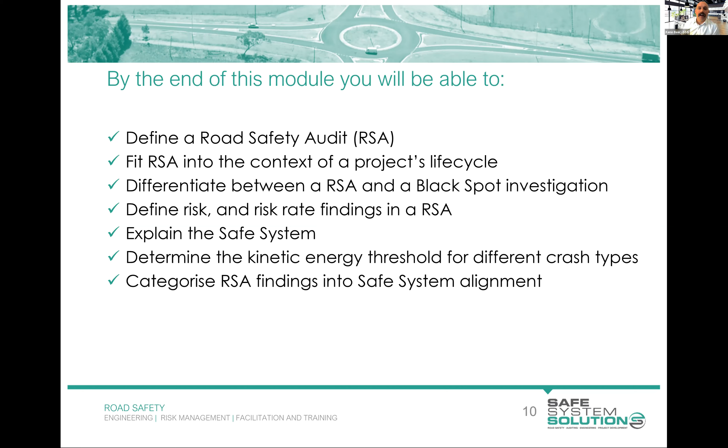What we do in this course overall is about the process of road safety auditing. There is no possible way in this short amount of time that we can teach you everything to see out there on the road network that presents risk. That's a never-ending learning process, and you need a lot of time and experience. But what we can teach you is the process and a few key things that keep coming up over and over, or typical ways to look at stuff.

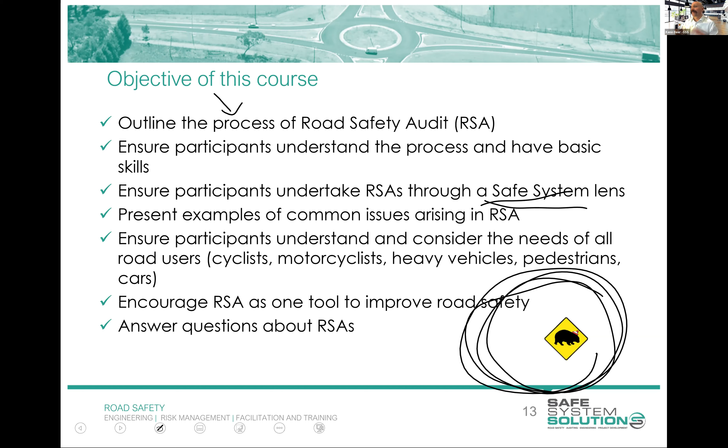There you go, I'm going to be nice. Wally count is one. No more help on Wally counts for the rest of the modules.

This looks messy and scary, this diagram. It's straight out of the Austroads Guide to Road Safety, Part 6, Road Safety Audit. It's showing the life cycle of a road or a project. You've got the project, so that's if you're going to do upgrades to a road, for example. But either side of that, you've got the existing road, and you've got corridor planning and business case and strategic thinking. Then the road's open, and you've just got a network. You've got a whole road network that's existing, and it's got issues, and you've got to maintain it.

You've got to look at things. So we can inject road safety into this whole life cycle in a number of different ways, and you can see them here. We've got safety vision, we've got proactive techniques, and road safety audit is what we call a proactive technique for injecting safety into your network or your project.

We've got predictive techniques such as ANRAM, AusRAP, IRAP, the Safe System Assessment Framework.

Now, Kathy, I didn't mention, but we have a lot of prizes that we like to give out. You were in the prize pit there with Emma. We've got to give out lots of prizes. So how about this - I'm going to say the first person to type in what IRAP stands for wins a prize.

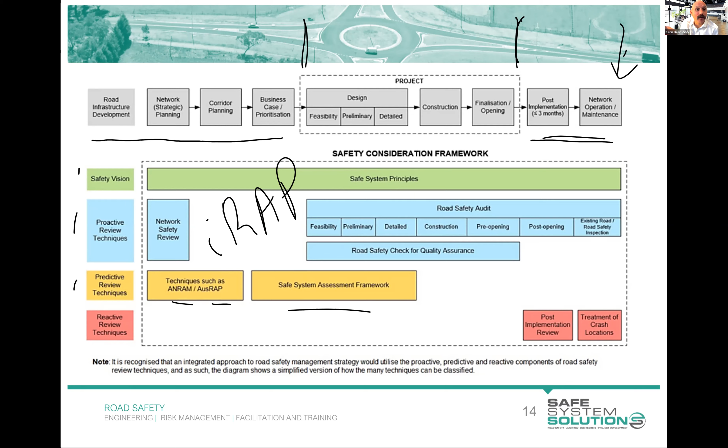IRAP, so it's part of the predictive review techniques, but basically it is an International Road Assessment Program that takes a whole lot of road variables and gives you a risk rating for the road. And actually star rates roads, the same way your fridge gets star rated or your washing machine gets star rated, your road gets star rated. We do a lot of it as well, Nick, so it's glad to hear you're using it as well.

And then down here we have this reactive techniques, right? These are once crashes are happening, or once you've identified there's issues - post-implementation reviews, or if you've got a cluster of crashes, treatment of crash locations, black spots. Okay, that's different to a road safety audit. Once you're dealing with a pile of crashes, you're actually doing another process. There's a lot of overlap between it and a road safety audit, but nonetheless it's got its own name - it's a black spot investigation or a crash location treatment exercise, crash review.

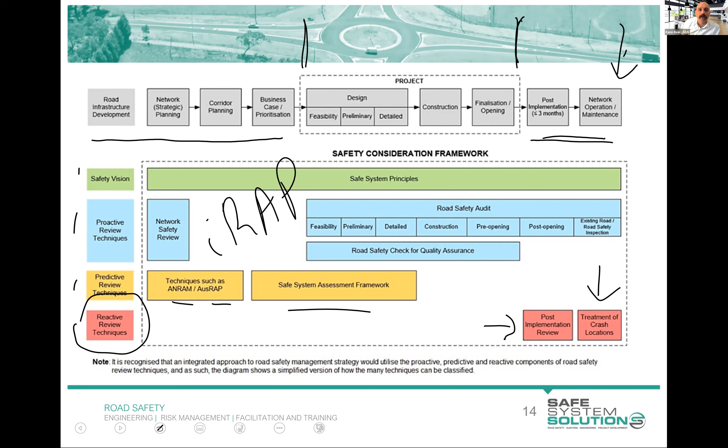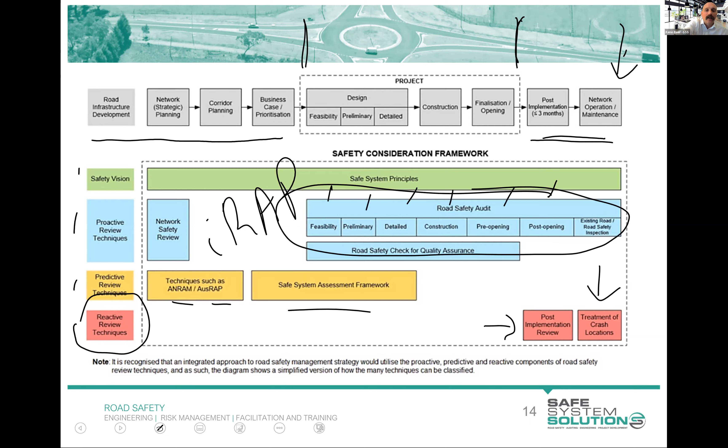Okay, so you see road safety audit sitting in there and lots of different stages of audit. They're all sort of stages of a project or an existing road, and I'll come to that later. But that's sort of a general context around that.

Okay, common road safety audit misunderstanding - that a road safety audit is a check against standards. Okay, it's not, because standards don't necessarily equal safety. So you may follow all the Australian standards, the Austroads guides, local standards and guidelines and the like, and what you produce may or may not be safe. It's a pretty good starting point because there's been a bit of good thinking into the development of guidelines and standards, but there's a few reasons. Standards may come together in a way that presents an unsafe scenario - so it may meet standard, and the other one meets standard, but they come together in a really bad way. The standards may be old, may have inherent risk as part of those standards. And sometimes people may be missing standards, or there may not be a standard around that topic that you're talking about.

Now, those who do road safety audits and do lots of road safety audits in other countries will see that some of the standards are just abysmal in terms of the amount of risk that is inherent in that standard. And so you may be picking up issues that meet their standards, but you're presenting as safety issues. This term road safety audit, though, has got this real connotation of like a financial audit, doesn't it? I mean the term audit - you're thinking, well, I'm checking that against the standard and giving it ticks and crosses. Well, road safety audit is not quite like that, but it does include a bit of review of standards as well. I'll take you through all this.

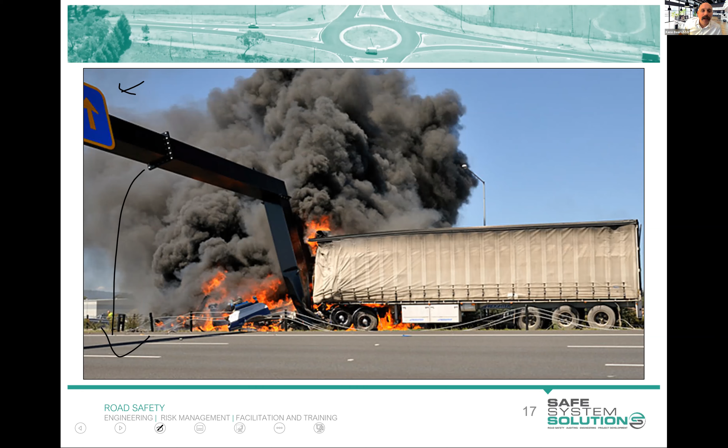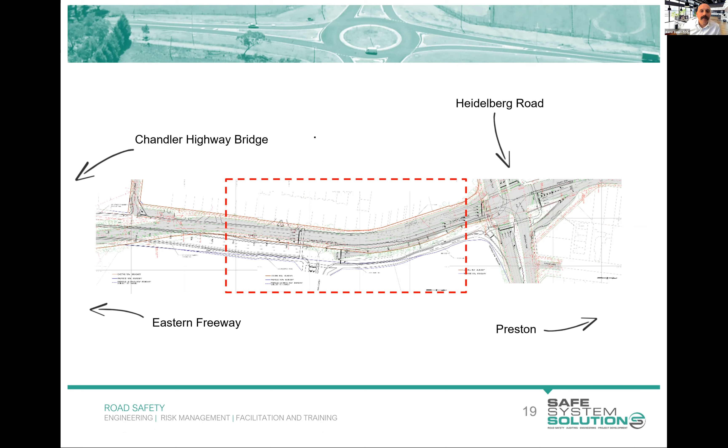And we know that a trap lane is going to have crashes in this area, because vehicles are going to come up to it, realize that all the other vehicles are going past, they want to get in, keep going - we're going to have rear end crashes, we're going to have side swipe crashes. The thing is that this is again a $500-600 million project, and they are building a trap lane into it. So again, as an auditor, this is where we can do some wonderful things, where we can suggest alterations to the design to make sure this isn't a trap lane.

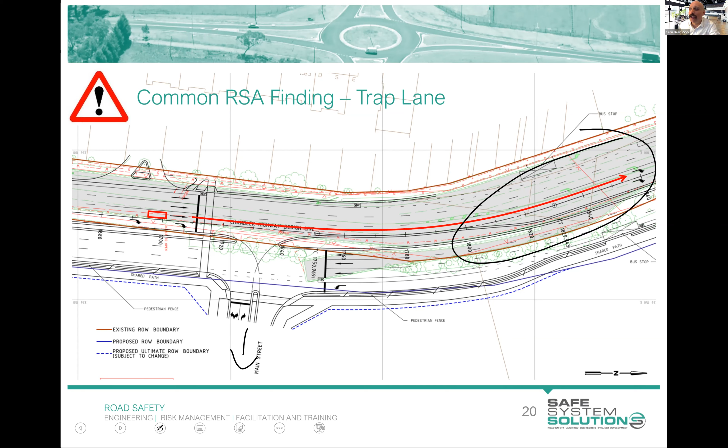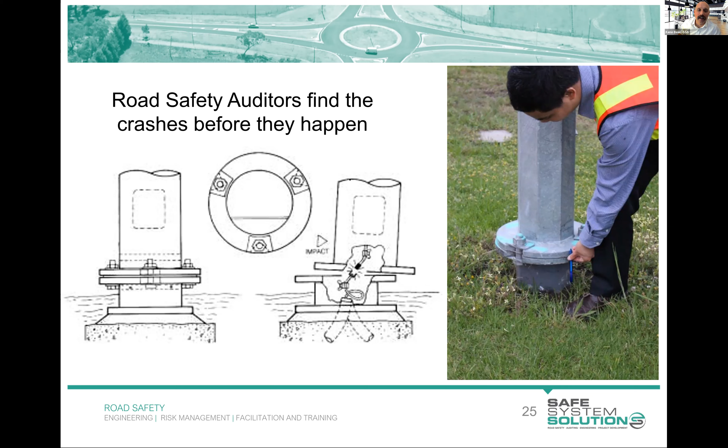Lighting, that's good. Is the lighting going to cause any see-through effects? Is it going to cause other issues? Is there enough of it? Does it cover the pedestrian crossing locations? All of these questions you might be thinking about.

And then you might say, okay, now what if somebody leaves the road and hits one of these light poles? What's going to happen then? So you might be suggesting that they use slip-based poles, or in some situations, you might be suggesting that a slip-based pole could be another issue. Now, somebody want to type in when they think a slip-based pole could be another hazard?

We just saw them working in action and they were awesome. But when would you potentially not be wanting to use a slip-based pole?

Okay, so this is good. We've got lots of people talking about areas with pedestrians, high numbers of pedestrians, and where is it going to fall? So who are we going to go with there? I think it was Nick who was first on the pedestrian ones. I think the pedestrian one is a sort of dominant one.

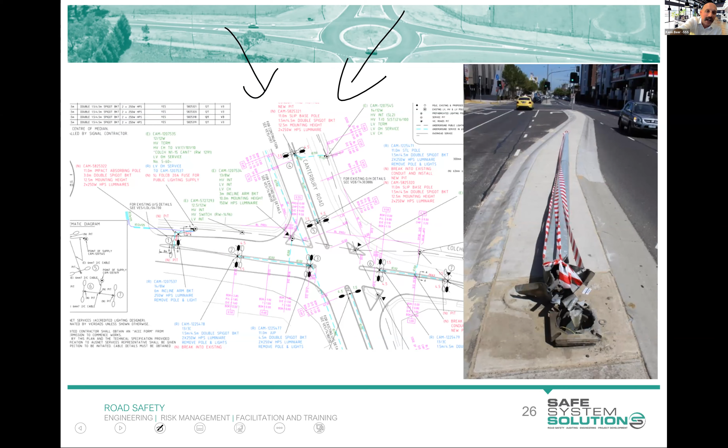So this was Victoria Gardens, and I was just noting that that one back there was actually just near there, which I thought—oh, it's quite a high pedestrian area just as the way it plays out. So something you might scratch your head about as an auditor when it looks like this. Because once it's in, I tell you, they're probably not going to change it. It costs a lot of money to change it. But when it's just at this stage, it's actually really easy to change.

Okay, so there is another type of frangible pole. Frangible is the term that we use for breaks away on impact, or it absorbs energy on impact. Frangible is a term very heavily used in our profession, and I always need to remind myself not to use it in community public consultations because they don't know what the hell I'm talking about.

But this one is called an energy absorbing or an impact absorbing pole, and it's like a slip-based pole, but it doesn't break away at the bottom—it actually just engulfs the vehicle within it, just the way this one has. So if you're really concerned about a pole in a medium to lower speed environment where you didn't want it going too far out, you'd probably use an energy absorbing pole. If you're in a high speed environment, you use a slip-based pole.

And if you're in a very low speed environment, you can just use rigid poles because the energy is not enough to be imparting death or serious injury on the drivers of the vehicles, and the dangers of it falling are greater than any potential injury to the occupants of the vehicles. So there's a little bit of an insight into poles. Again, I'm just picking random topics.

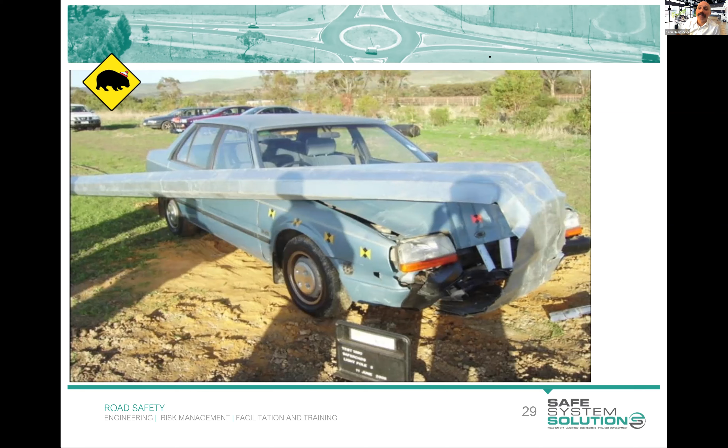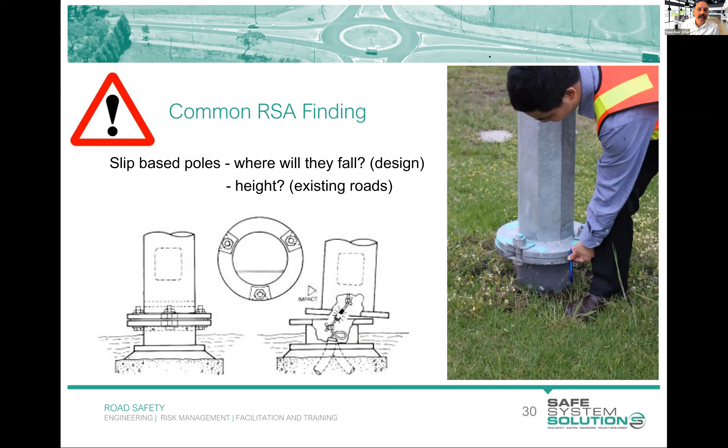The thing is, a slip-based pole or a rigid pole can meet standards in pretty much any scenario. You've just got to make the judgment in contextualizing it in the right spot, asking the right questions. The common audit finding is whether slip-based is chosen, where it will fall, and what's the height of existing slip-based poles with the shearing plane.

Another common misunderstanding is that road safety audits are proactive and black spot investigations are reactive. This is one I still get weekly: can you come and do a road safety audit, we've had 10 crashes at this intersection? Now I say, you want me to do a black spot investigation, really?

Now, the lines are blurred here. You can do a road safety audit of that intersection, it's just you don't really delve into the depths of those crashes. You don't get the police reports, you don't need to. You don't need to look exactly at what was going on, because you're auditing what's there and what you see, and it's not driven by just those crashes.

As I said, this one's probably blurred a bit, so I'm not as concerned. And in fact, this question here - should you look at the crash history as part of a road safety audit - this is personal preference for auditors. It's up to you. I know auditors who refuse to look at crash history, and I know auditors who love looking at crash history.

I will often do my audit, then have a look at the crash history just to see if I missed anything and validate that I was thinking along the right lines. You might look at everything, then come back and look at the crash history and find it had 5 motorcycle crashes. You say, whoa, what am I missing here? Is there a major motorcycle route I've missed completely? Hopefully you'd be able to pick a lot of that stuff up from discussions with your client anyway.

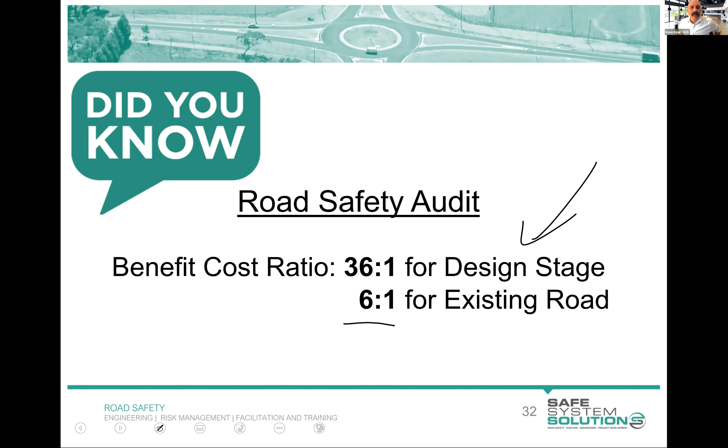Yes, thank you, Ken. So what about auditing proposed designs, i.e. black spot treatments? There's a question here saying, I often get them done once our design is ready to be issued for construction. Yeah, okay, that's probably a little late once they're ready for issue for construction. I'd like that done a little earlier in the process in order to be able to alter the design and genuinely take on what the auditors are saying.

If you've got your detailed design set fully ready to go, basically stamped and issued for construction, there's a lot of reluctance to make changes, and it starts to lend the audit process into a tick box exercise, which we don't want because that's a waste of everybody's time and money. So a little bit before that would be good. Get your design done, everybody generally happy or on the same line, get it audited, and the auditor might come back and suggest extending the barrier a little bit, or altering this, or changing this, or pointing out you've designed a trap lane in there.

We see this as a concern. Could that be altered? Remember that the auditors are just providing you advice, okay, you are not bound by what the auditor says. You've got a raft of issues to deal with - drainage, community, costs, all this stuff to deal with. The auditors are putting forward their opinions on how you can get better safety outcomes, or identifying you've designed in an absolute clanger. I can show you some, in fact I'll show you some shortly. So a little bit earlier would be great.

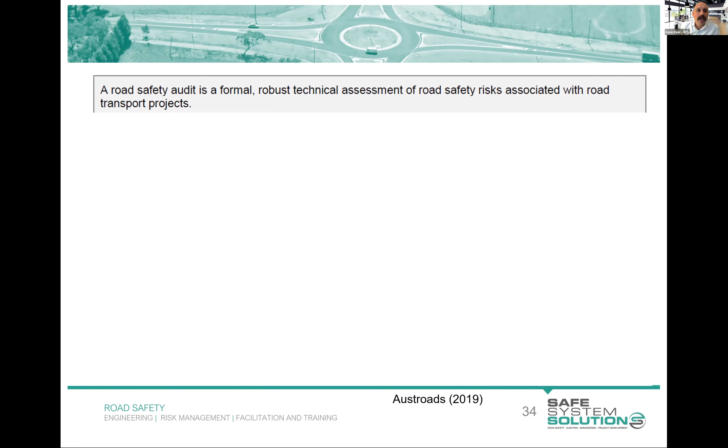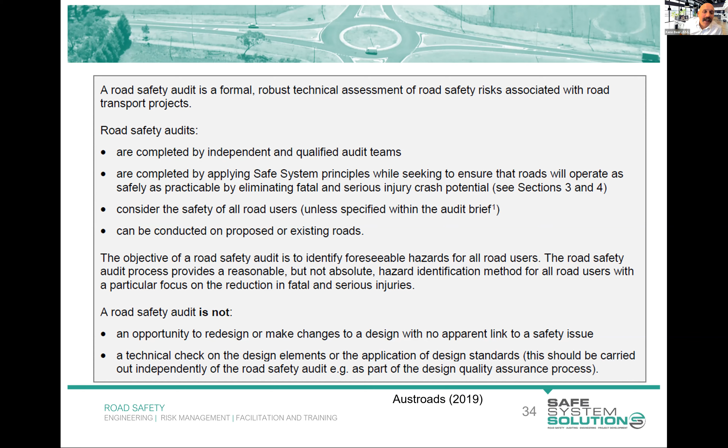This is the definition of a road safety audit. It is a formal, robust technical assessment of road safety risk associated with transport projects. It's completed by independent and qualified teams. It applies safe system principles while seeking to assure roads operate as safely as practicable by eliminating fatal and serious injury. It considers the safety of all road users, unless specified within the audit brief - I'll come back to that. It can be conducted on proposed designs or existing roads. Its objective is to identify foreseeable hazards for all road users, and it provides a reasonable but not absolute hazard identification method, really focused on fatal and serious injury. Now, it's not an opportunity to redesign the project with no apparent link to safety, and it's not a technical check on design standards. That should be undertaken internally as a quality review process with any design house anyway.

Let me just point out a few specifics. It's formal, okay - the audit process is a formalized process. It's set, it takes time, and there's a specific way it has to be done. You can't just call anything a road safety audit, it's got to be done in this process. It's got to be done by independent and qualified teams. You cannot road safety audit your own design. You cannot road safety audit a project that you are the project manager for. You can road safety audit a road that you are managing if you're a council or a state road authority or a department of road authority - that's okay because it's not your design, it's the existing road network.

It applies safe system principles - I'm going to take you through that. All road users, all right, we're thinking about everybody. If your brief says this is a motorcycle-specific road safety audit, you're just thinking about the issues for motorcyclists, or if you're doing a cycling audit. I'll talk about what we call thematic audits later, but it's got a specific theme - motorcycle, cyclists, walking, proposed or existing roads.

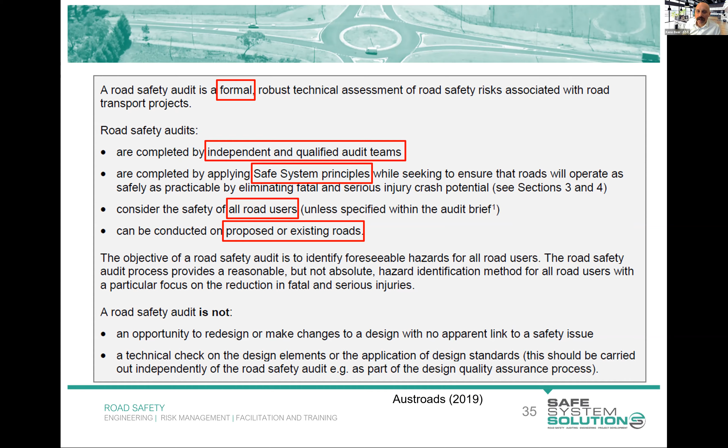Okay, let's talk about the safe system. I think we might have a quiz coming up shortly, unless I've hidden that slide, but anyway, I think we do. The safe system is probably something very familiar to a lot of you, so I won't spend too much time on it, but basically the safe system says humans are flying around or traveling around on this transport network, and the human body is vulnerable and it can only handle a certain amount of force.

We know that people make mistakes. It's part of being human. They're going to continue to make mistakes, and we've got a shared responsibility, which means that knowing people are going to make mistakes and knowing that their bodies are vulnerable, we've got to start designing the road and the infrastructure, the speeds and the vehicles to accommodate that error and the energy and forces associated with it. We are going to do everything we can to minimize mistakes. Don't get me wrong, it's not like we're just going to happily let crashes happen. We're going to minimize the number of crashes, but some are still going to happen because mistakes will happen, and we need to manage that energy.

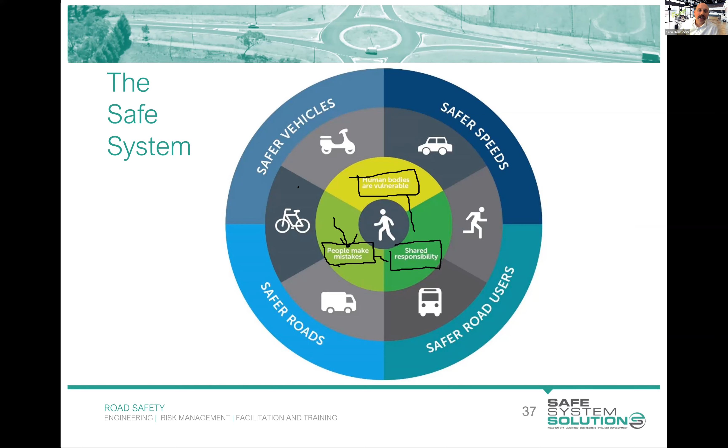The key principles of the safe system: we're aiming at no death or serious injury. That's our aspiration, that's our future intent. I'm not going to get caught up in the debate of whether that'll happen within your lifetime or not, and those sort of things - we aspire to that. We know people make mistakes, we've got a shared responsibility, and people are vulnerable.

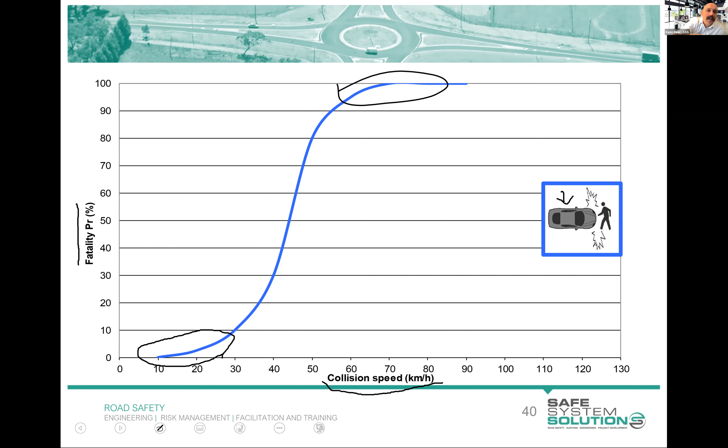Now, Usain Bolt, he came in up there in terms of his running speed. And I do that analogy because if you park the car at the end of his lane, when he ran that world record 100-meter sprint and he crashed into that at 44 kilometers an hour, will he survive? Well, he's the hulk of a human, so he's probably going to survive. His stature is strong - we kind of evolved that way as humans. We're strong enough to run into solid objects at our maximum running pace. That's generally around our tolerance to physical force. And of course, we propel ourselves way faster than that, and objects come at us way faster than that, and we're just not designed to tolerate that.

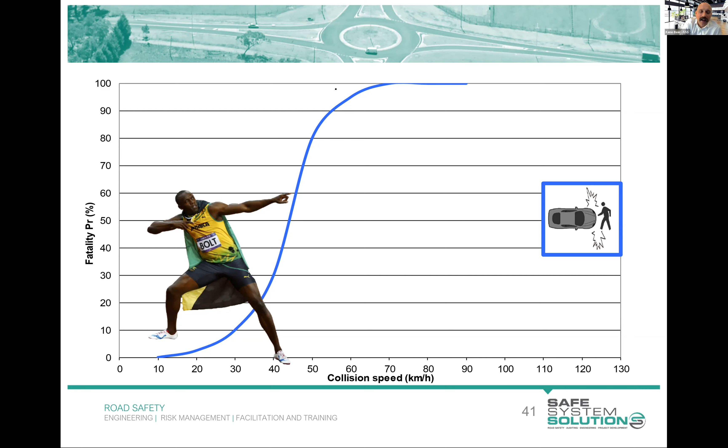What we are designed to tolerate is this sort of stuff.

This is one I really miss the feedback of a live audience going, ooh. But this is what we're designed to withstand in terms of force. And certainly he recovers, he leads a normal, healthy life.

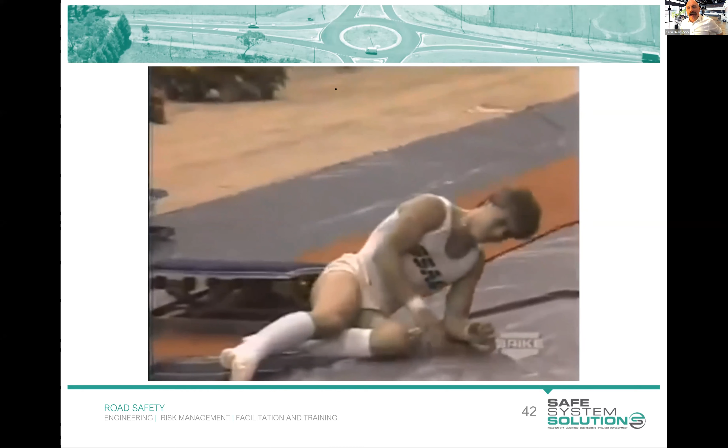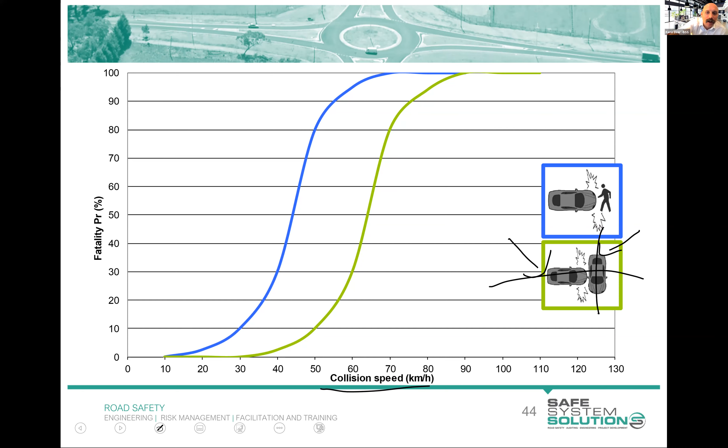We have this information for other crashes as well. So this green line, this is the bullet vehicle, the one that does the striking, does the damage. This is the target vehicle, the one that gets the death and the serious injury. Bullet vehicle speed at a right angle crash, around 40, 50 kilometers per hour,

highly likely to survive. Up at around 80 or 90, highly likely to be killed, the target vehicle occupant, if struck on that side.

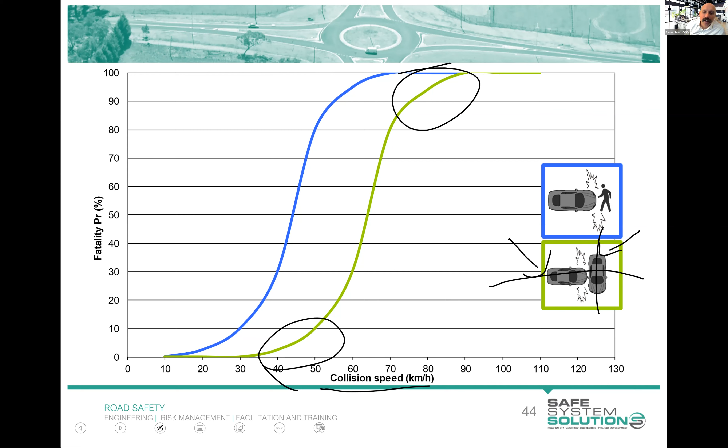And head-on crashes, okay? Head-on crashes we see around 60, 70 kilometers per hour, highly survivable, up around 100, 110, highly likely to be killed. And that's the speed of each vehicle, not the closing speed as such. It's the speed of each vehicle.

Now, this stuff is actually really important as we go about road safety auditing to think about that severity of crash, okay? And so what we do in road safety auditing is draw a line at this 10% level. And we ask the question in the audit:

will the crash that I'm predicting happen above this point or below this point? So I'm worried about pedestrians being struck. Will they be struck at speeds above 30 or below 30? And we just make some commentary around that in the road safety audit.

Now, there's a little bit of give or take around this, but generally 70, 50 for intersections, 30 to 40 for run-off road, side impact into a tree or a pole. That's very low, isn't it? 20 to 30, somewhere around that, for vulnerable road users.

So you're going to be asked, when you visualize this crash in your mind, whether it is above tolerable levels in terms of kinetic energy or below tolerable levels in kinetic energy. And the kinetic energy is based on the speed, the mass, and the angle. I'll get into it. I'll give you an example. So if you're a little confused at this stage.

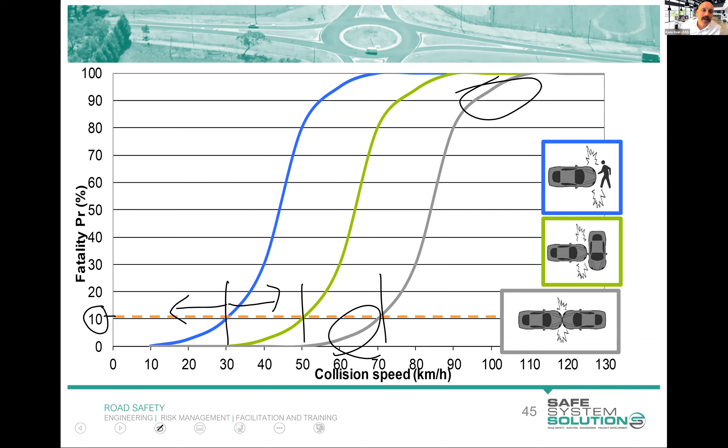All right, let's get into it. So here we go, let's get into some designs.

Right, what are we doing here? It looks like we're building a signalized intersection. And it looks like it's a roundabout being ripped out and the signalized intersection going into play, because those dotted blue lines underneath look like a roundabout setup.

Okay, so we've got the traffic signals coming in, and I'm just going to step you through how you would go about writing up a finding, an audit finding. So you've been looking through these designs, you're pouring through it, you're identifying things that you're concerned about, you're imagining it built, you actually get out on site as well.

I'll talk to you about this. You get out on site, you look at that roundabout as it exists, and you say, okay, well, that's getting removed, and these traffic signals are coming in. I wonder what the issues are going to be. And so here they've proposed line markings and changes.

They're putting in a proposed JUMA, or JAMA, depending on how you pronounce it. Prize for the person who can first tell me what that acronym stands for. That doesn't really matter in road safety audit terms, although you should know.

Let's see who's got it. Oh, Lily was in just before Chris. I think it just came down to internet speed on who got that one first. Joint use mast arm - Lily, prize coming your way. So it's a joint use mast arm, that's where you have your traffic signal and your street lighting all on the one pole. It's a joint use, and it's got the mast arm, which sits out. Okay, so I'm going to take you through how to write up an audit finding.

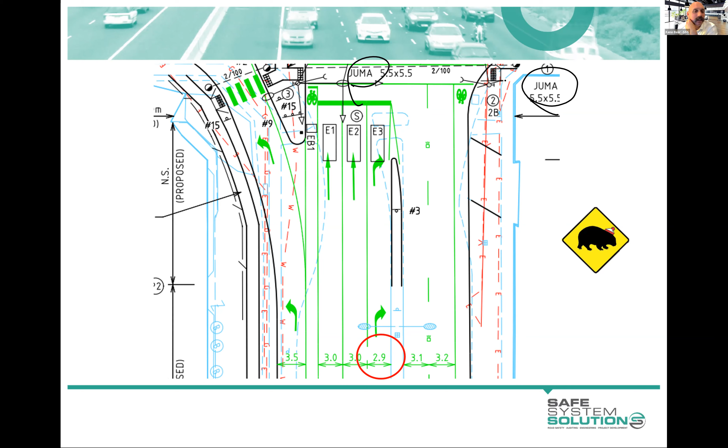Okay, my audit finding on this design is this: we've got a 2.9 meter wide right turn lane. Now, I know there's some standards and guidelines, but let's not worry about that. That sounds narrow, okay? Even the ones next to it sound narrow, but I'm going to pick on this 2.9 meter wide right turn lane.

Now, when you're writing up an audit finding, it's important that you flesh it out and explain it to the client, the person who's receiving your audit report. 'Right turn bay is too narrow' - okay, well, that's an audit finding, but they're going to get that and go, which right turn? How too narrow? You're not really telling them anything. That's what I would call a poor example.

Here's a fair example: 'The right turn bay from main road to side road is too narrow. The concern is it increases potential for side swipe or rear end type crashes. Also, Austroads Guide to Road Design states the minimum traffic lane width should be 3.' Okay, so you've got some more info - at least we know where it is now, we know what type of crashes we're worried about, and we know there is a standard in this case that might be worth understanding.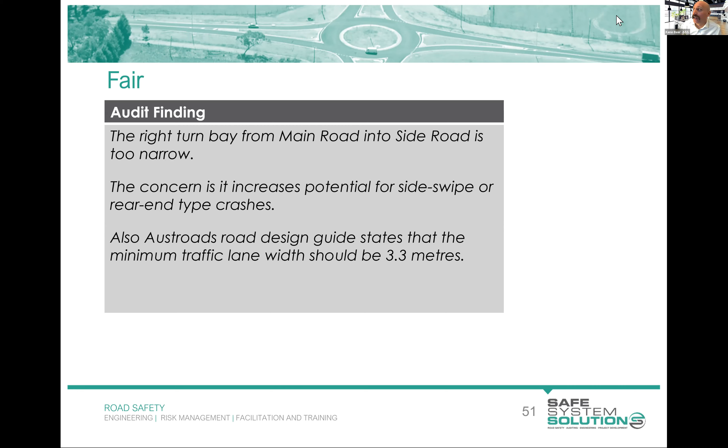Here's what I'd say is more an excellent example of an audit finding: 'The right turn from main road to side road is too narrow for the width to adequately store turning vehicles. The concern is vehicles will encroach into the same direction traffic lane while either performing a right turn manoeuvre or waiting in the bay, especially if more than one vehicle is queuing in the bay. This therefore will increase potential for side swipe, rear end crashes, particularly under wet weather conditions and at night. The Austroads guide also states there's a minimum of 3.3 meters.'

The traffic volume is high. It's in a 60 kilometre per hour speed zone, and the concern is likely to occur occasionally with likely minor injuries.

And a really important little thing here: a snip of the design and something indicating where that is. I really love seeing this - photos and snips in the audit report. That is so much easier for a designer or project manager to go, oh yeah, I know exactly what they're talking about. I don't have to read swathes of text and think, which way is north, am I talking about that one or this one - I'm confused. No, it's clear as day.

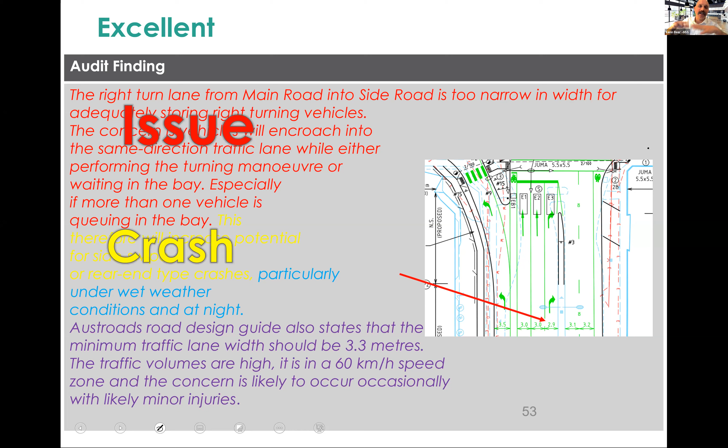Then you actually talk about the crash that could happen. And I want to see in their descriptions, rear end, run-off road, intersection crash, side impact crash, whatever it is, be specific. Then any particular factors that may increase the risk, decrease the risk, or the like. And then any standards or guidelines, if applicable.

Okay, the purple one is very optional. You don't need to refer it back to a standard or a guideline. And you either maybe don't know of a standard or guideline, or you know of it or it meets it.

You might want to write that. You go, it is acknowledged this meets the current standards. However, the auditors are still concerned about the crash potential. And so you're actually laying it out there. And if it doesn't meet standards and you're aware of that standard, you can mention that as well. But that's all the optional one.

So when you go to auditing, I really want you in the write-up of the audit to go through this: issue, crash, risk factor, standards and guidelines if applicable. And it forces you into a few things, which is good.

Nice description of it. This crash one's really important. Because if you can't identify and put clarity out there on the crash that could happen, it's probably not a road safety audit issue. And often we see this with especially technical people, designers, and the like.

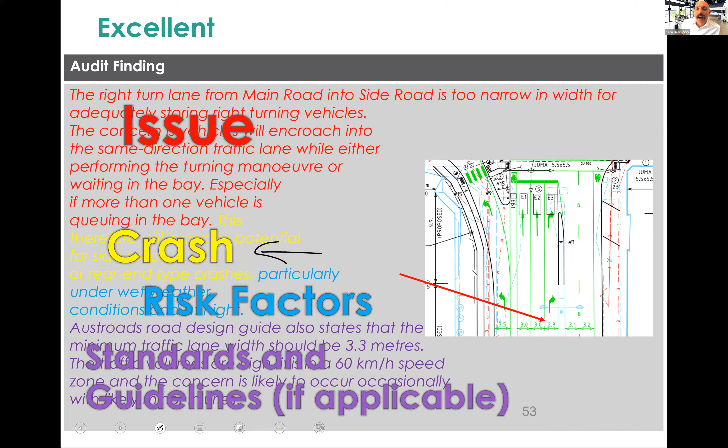Okay, so that's writing up the finding. But how do we risk rate these findings? So we found an issue. Back there we discovered the lanes too narrow. It's going to have side-swiping vehicles and rear-end challenges and the like. Well, we need to then risk rate that. Is this intolerable risk or is this very low risk?

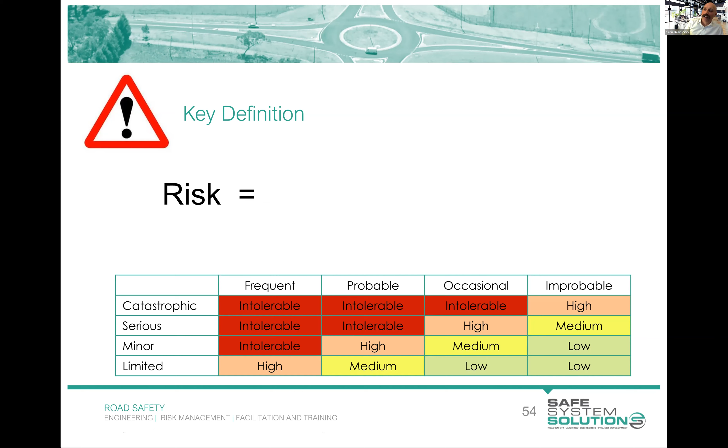And the way we get to that is the sort of international formula for risk. Now, first person who can write that in there, sort of risk is this times this. You can have a prize. First person to write that in. Nick's just got in there with likelihood times consequence. So likelihood times consequence, or frequency times severity, depending on where you come from.

So it is, what is the chance the crash is going to happen, and when it happens, how bad is it going to be? And we use a slightly modified risk table from the usual 5x5 matrix that is used in risk management for road safety auditing. In the next update, we're actually bringing it back to a 5x5, but for now, you still have to use this one. All right, and what it's got here is the severity of crash and the likelihood of crash.

And so we've got catastrophic, serious, minor, limited, and frequency: frequent, probable, occasional, improbable. So if the crash you're concerned about, you believe it'll occasionally happen, and when it does, it's going to have minor injuries, your crash risk is medium.

If you think, wow, this is going to happen all the time, and when it happens, it's going to be absolutely catastrophic, the risk is intolerable. So that is how you arrive at your risk rating.

And in the Austroads Guide, part 6A, page 27 — yeah, it is page 27 — you get a bit more information about this, right? It's not just...

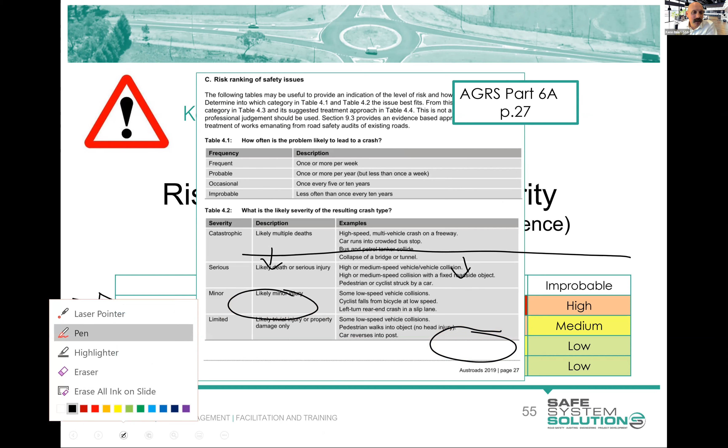So this is where you can go to look at, okay, what actually is frequent? Once or more per week. Okay, what's improbable? Less often than once every 10 years. Okay, so now I'm getting a gauge for the timing, the frequency of these crashes. Okay, what's a minor crash? Likely minor injury, low speed vehicle collision, cyclist falls from bike at low speed, left turn, slip lane crashes. You get some examples.

And so you're calibrating your risk rating based on this stuff. Now, the thing that I always point out here, and it's often that people don't really listen to me or hear me, so write this down or something.

Road safety auditors, when they're new, over risk rate things, but in a big way. Everything's intolerable, right? Because you've imagined it, you've seen it in your mind, and you're just like, this is going to happen for sure, right?

But the reality is, in the whole scheme of things, each site has few crashes. If you had an area that was having serious injury crashes every year, that's a really highly severe intersection and it will be heavily looked at.

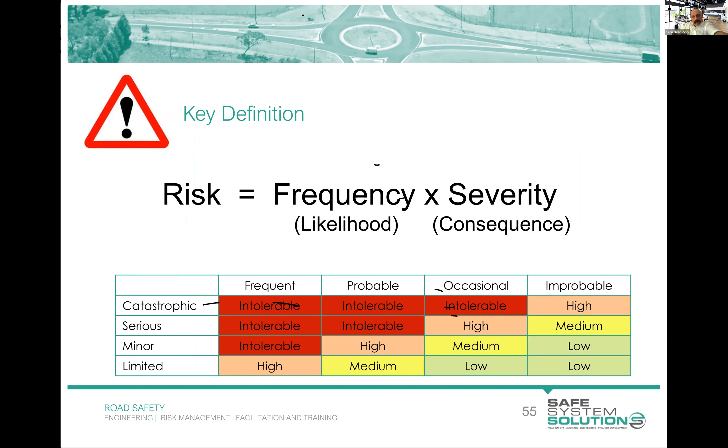Excellent, thank you, Ken. Tell us about nuisance impacts, are they considered in road safety audits? So nuisance impacts may come out, if I go back here, you may give it a limited rating down the bottom there, in terms of severity of crash, limited. And limited we see there, likely trivial or property damage is the outcome. So you may decide to do that.

Other questions? Do you take into account traffic flows, turning movements within the audit? You do, you can. It all depends on how it all plays out.

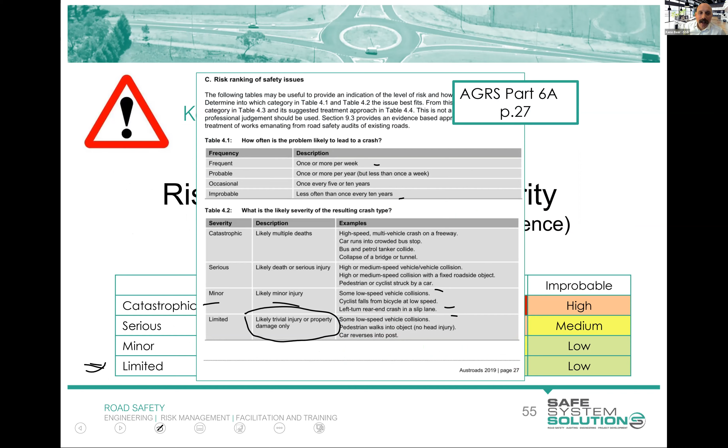But in order for you to get to making a call on frequency, that's going to be a big factor, isn't it? If the road has 2 vehicles a day turning out of it, the frequency of crash is going to be a lot less, even with the same sort of configuration as one that has 2,000 vehicles coming out of it. So you're taking volumes and turning movements into account because of that.

You also might be looking at the traffic modeling, the SIDRA or whatever it is, to understand how's this actually going to operate. Is the turn lane long enough? Are they going to queue into the fast lane? Is there enough turn time? So all of that has got to be factored in.

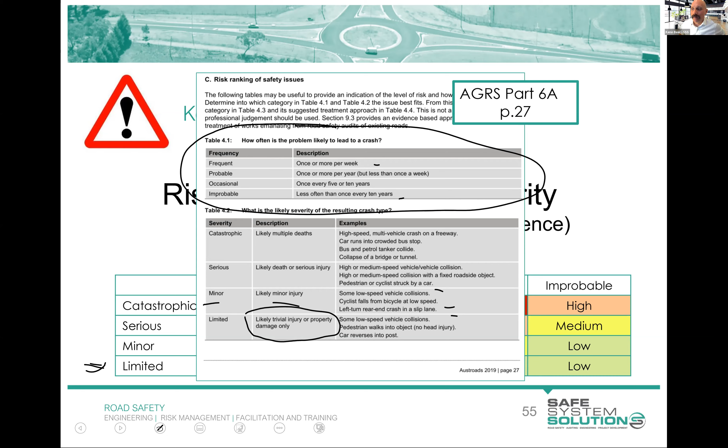Okay, so we've got our issue, we've got the risk rating, right? So we've got occasional and minor for this risk. Minor because it's sideswipes and rear ends, right? These can actually happen at fairly high speed without death or serious injury. And so it's minor. I think it's going to happen occasionally, so it's a medium risk, right?

Now, I don't know, some of you, if I'd let you risk rate that, you might have gone far higher because it's 2.9 meters. That's fine. You know, drivers are generally pretty good, they won't intentionally be crashing into stuff. So anyway, it is a bit subjective, risk rating.

There is no right or wrong, by the way. And you'll notice that if I don't like your risk rating, I won't say it's wrong, I'll just say you're a bit off where industry would risk rate this. Right? Then you start looking at this and you go, rightio, where are we in this impact threshold speed table that we talked about?

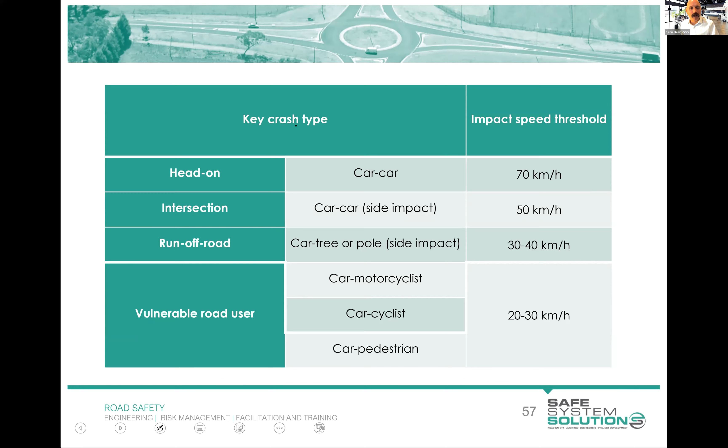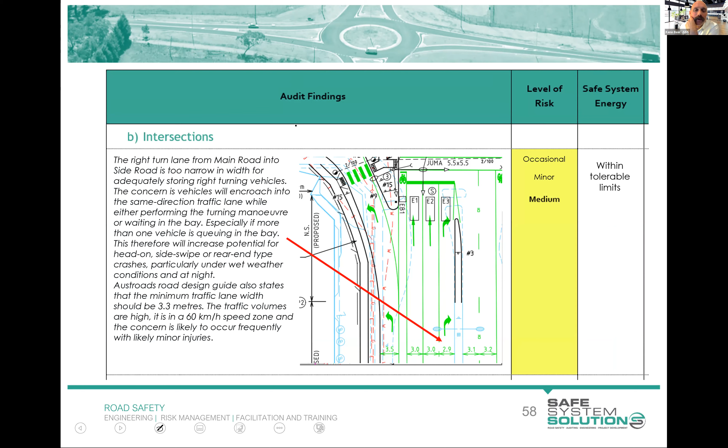And we go, well, we're within tolerable levels because it's side swipe, it's rear end. These crashes can happen at decent speeds without people being killed or seriously injured. So we've put it within tolerable limits for our safe system energy.

And then we go, right, what do we recommend? Consider measures to reallocate road space to allow for at least 3.3 metre lanes. Now, we haven't done the design for them. We haven't provided a huge amount of information, but we're just saying, you work it out, but that's the issue. And actually, in the Austroads guide, it does say you are not bound to make recommendations.

Any of you who end up doing road safety audits in New South Wales will discover that the New South Wales government does not let you make recommendations currently. I think that's going to change, but they don't like to be told what to do, or even have recommendations. They're actually concerned about legal liabilities of not doing what an auditor says. Now, that's really just a misunderstanding of the audit process to think that, but nonetheless, that's where they currently sit.

But auditors are not really bound to make recommendations, but we do. Industry practice is that you make recommendations, you try to help out. And so there it is. I tend to use this term 'consider' at the start because when I'm auditing, who am I to be telling this project what they should or shouldn't do? I'm just injecting some things that they should consider.

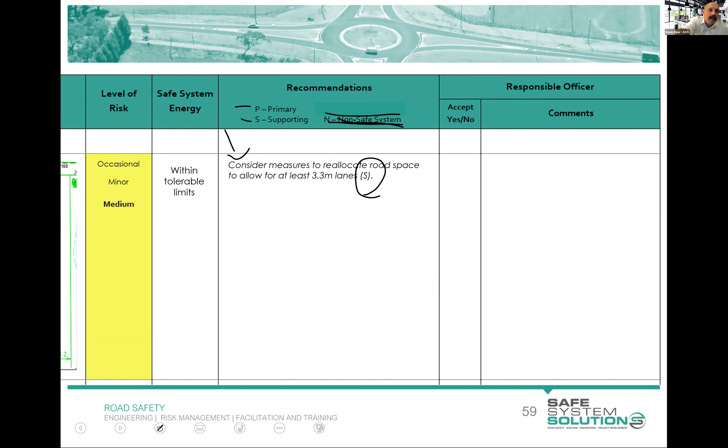The last thing I mentioned is this: you've got primary, supporting. Forget about 'non' because we'll never be presenting that, that's in there for language. You're either going to categorize your finding into a primary or a supporting. This is going to be the biggest confusion you will have as an auditor. What on earth do those mean? So I think we've put this page into your notes in big because it helps you, but they're not saying primary is your number one recommendation.

Road safety interventions and infrastructure have been categorized into primary, which is road planning, design and management considerations that virtually eliminate the potential for fatal or serious injury occurring in association with the foreseeable crash that you're thinking about. Supporting planning, design, management considerations improve the overall level of safety with the foreseeable crash, but are not expected to virtually eliminate the potential for that fatal or serious injury crash occurring. And they also don't change the ability of a primary treatment to go in the future.

This is really one where you will practice this. You'll get a better understanding. There is an Austroads document that has lists of treatments and categorizes them, but your audit finding may have multiple primary treatments, or it may have no primary treatment and all supporting treatments.

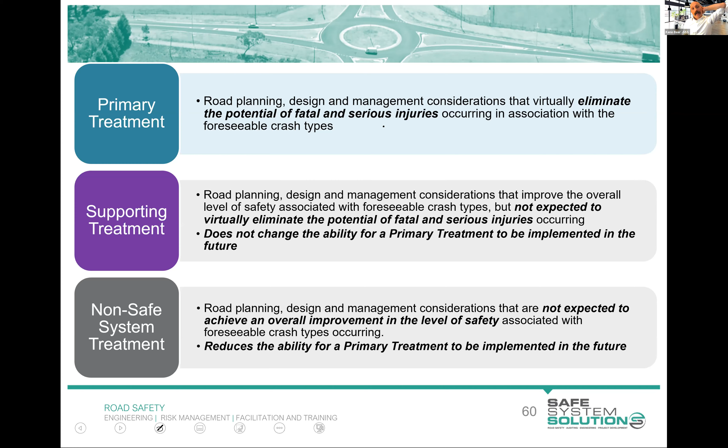Okay, so this one was a supporting treatment. The reason for that is that if they go and redesign it and make the lanes 3.3 metres, it does not virtually eliminate side swipe or rear end crashes. It certainly lessens the chance. But people can be texting, they can be half asleep, drift out of their lane. They're still going to sideswipe. They're still going to rear end. This is going to lessen the chance of it, but not virtually eliminate it.

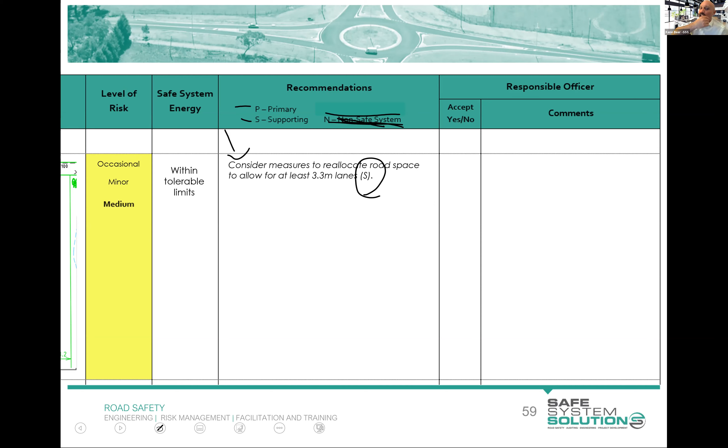Quick question, Ken. Oh, okay, I was about to jump onto another example. Let's go with the question. Sorry, it's about the tolerable levels. Here's a scenario for you where turning vehicles are queued, but through vehicles are travelling past. What about the situation where someone ducks out from the turning lane? Does this go above the tolerable level?

So you'd have to look at what speed the vehicles are going past, what's the crash type, which is still going to be a side swipe or rear end. And we know that those can really be happening at somewhere around the 70 km/h mark, even higher for side swipe, and they're generally within tolerable levels. So I hope that explains how I would analyze that.

The vehicle's turning when they get struck, that's down at 50 or so. So that's a friendlier crash. Or side swipe, the vehicle turns out and crashes. That's a far friendlier crash than having a vehicle coming at you.

And Duncan makes a really good point there, unless you're a road user that's much more vulnerable, a cyclist, a motorcyclist, pedestrian. So you've got to think about it all within that mix.

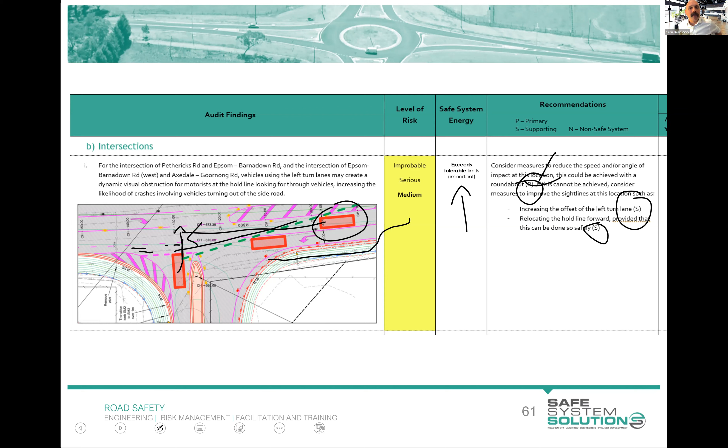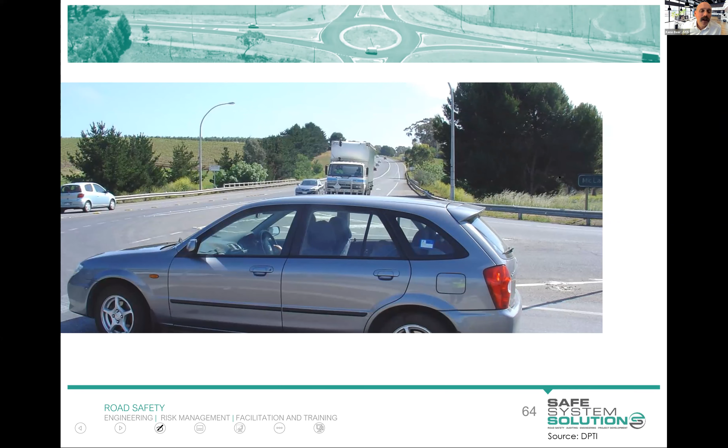And that's the exact scenario we find in quite a lot of side impact crashes. The primary treatment would be a roundabout, to slow everybody down and improve the angle of impact, with supporting treatments as well.

Little tip again, because I know this is going to be a struggle: to be categorized as a primary treatment, it must either address the consequence of the crash or virtually eliminate the possibility of that crash happening at all. And by virtually eliminating, this must take into account general human error — accidentally running red lights, falling asleep, turning around to scream at the kids who are fighting, whatever it is — things are still going to happen. So the consequence approach is really about slowing speeds down and improving the angles of crashes. I think the easiest way will be when you practice.

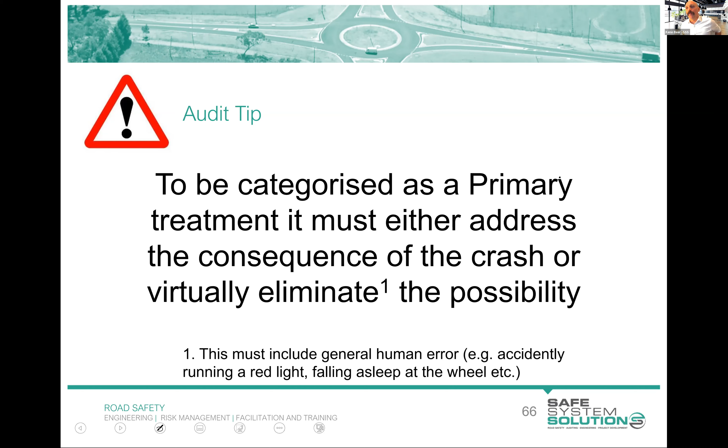I think we just have time to do this quick quiz — if there is one, there may not actually be one. We may have crammed it into the other one. I think let's skip this one, Ken. Okay, I'm running out of time — that's code for, okay, here we go.

A few words: a road safety audit is not another name for just a site inspection — you're just going out to inspect a site. It's not a road safety audit unless you go through the full formal process. It's not a quick check of a design or an existing road. Your designer next to you doesn't throw the designs over and say, oh, can you road safety audit those and have them back to me after lunch? No, there's a whole process to go through. It's not another name for a black spot investigation or a substitute for that. It's not an opportunity to redesign the project. It's not a design review against standards or a method for prioritizing or ranking project options.

That's a common one you get asked to do - a road safety audit of these four options and rank them from best to worst. Not your job. You identify the issues in each of them and provide that back. If they're insistent on that, you can provide a separate memo that gives your opinion, but that's not part of a road safety audit.

And it's not a safe system assessment. That's a different beast. Actually, safe system assessments are far better for doing that prioritizing and ranking. And it's not a safety in design check either.

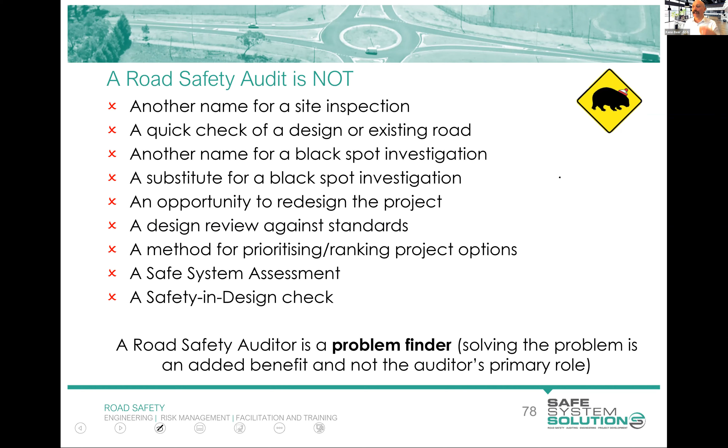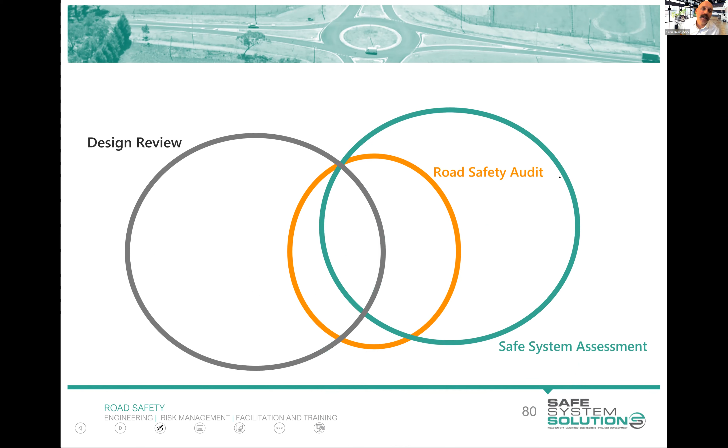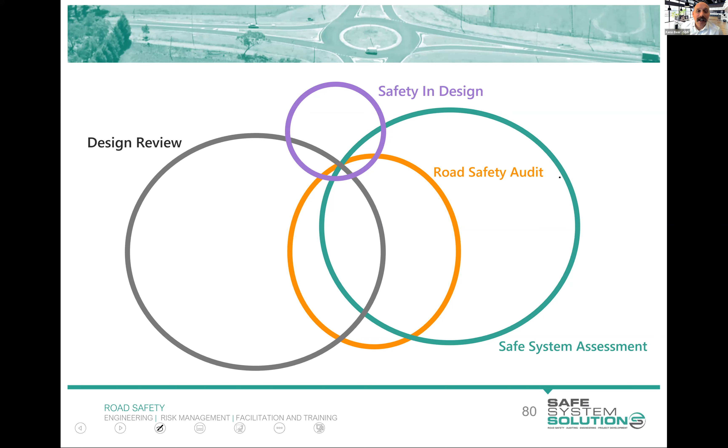So road safety audit, design review - there'll be overlap in just the usual design review process. Safe system assessment overlaps a bit of both of those. Safety in design is that one of, can it be constructed safely? Can it be decommissioned safely? Can you do maintenance activities safely and all of that sort of stuff? So there's a bit of overlap between all of these.

But what can be audited? Well, anything that interacts with the road environment, and sometimes not even with the road environment. You can audit off-road cycleways and shared paths. So all of these things can be audited.

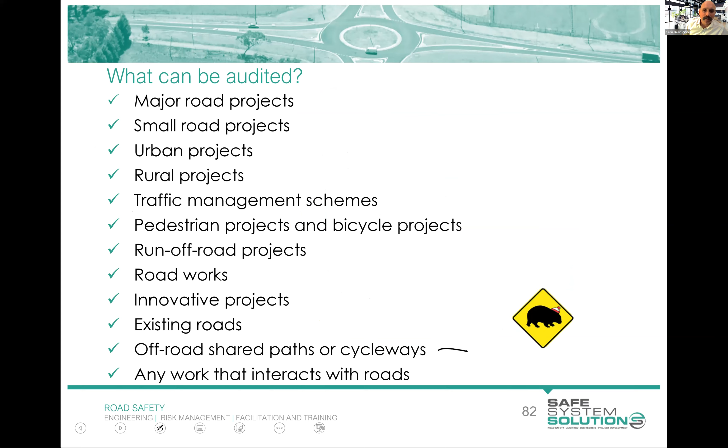Now this is a good example, but I'll just quickly go through it. All this council was going to do was seal this unsealed road, formalise this unsealed road. They thought, I don't need to do a road safety audit - I mean, we're just following the design guide and everything's great. We're improving this road, why would we do a road safety audit?

Well, they went ahead and did it, and then the number of crashes at this intersection skyrocketed. The reason for that was that people approaching this road, when it was like this, it was very clear to them that this road didn't continue. This goes back to our see-through effect - as soon as he did that, it just looks like it continues on straight through.

So this is a great example of where we should be doing road safety audits on all these small infrastructure projects. Even if you can't, as a project manager, see why, you'd get value from that. That's not the point - the auditors are these independent checks, they see it from a different perspective. It's something we're really looking for.

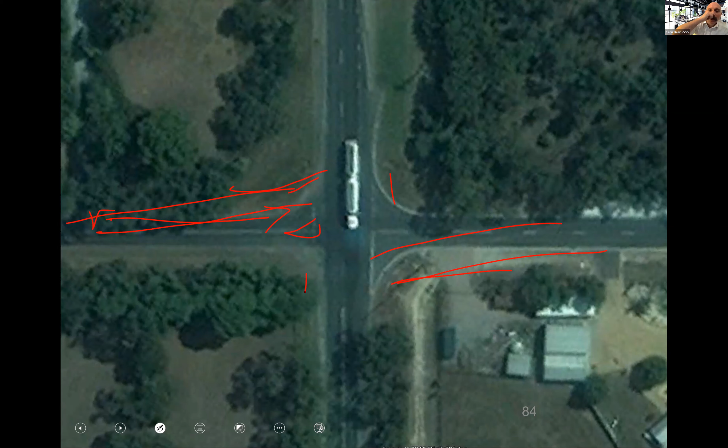The audit could have suggested big things like a roundabout, but also things like splitter islands, which would really help, more advanced warning, maybe staggering the intersection so it doesn't look like a straight through - it's an offset T intersection. Put a hazard board there and there - you don't drive straight through that, do you? There are many things an auditor could have suggested.

Okay, I'm just going to run through a few slides here about the different types of road safety audit, and then I'll give time for a few questions before we close out today's session.

So there are these official types of road safety audit, and the types are based on the project stage, really. You have feasibility design road safety audits, preliminary design road safety audits, detailed design road safety audits. You have roadworks or construction site road safety audits, pre-opening - so that's just before the minister cuts the ribbon and opens the road - post-opening, so the road's open, it's live to traffic but it's just been built, you look at it. And existing roads or thematic road safety audits.

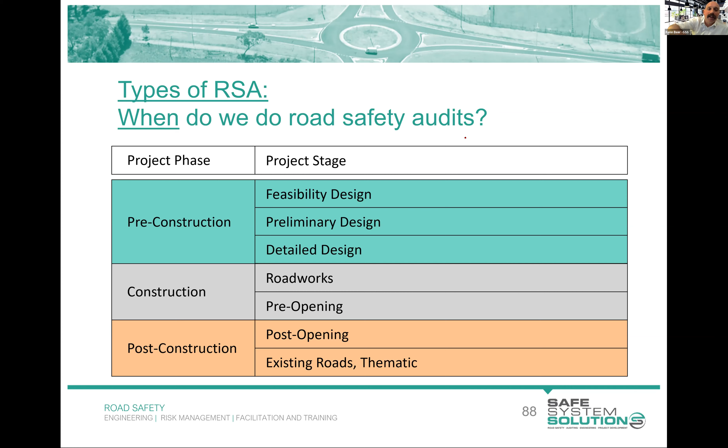The feasibility audits are what we generally call the planning stage audits. These are really big planning level things - big town bypasses, you don't have much detail at all. But you're thinking about how residents are going to get down to the shopping centre, where are they going to go, how are people going to cross the roads, what are the interchanges like, are they going for signalised intersections or roundabouts - big picture, planning stuff.

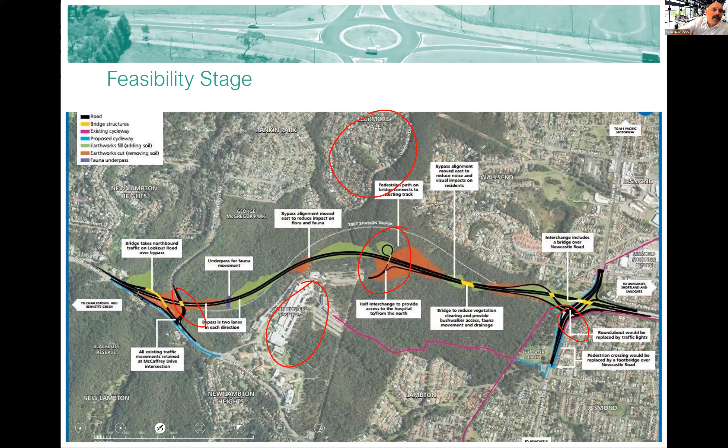Then we get into maybe a little more detail, and there's still what I call a feasibility where you're saying, okay, signalised intersection, U-turn breaks, how's that all going to play out? But you're not given much detail.

The preliminary or concept is starting to get a bit more detail, a bit more meat on the bone of your design. So a preliminary design road safety audit, you're starting to see this stuff. It may be on a survey base, it may still be on an aerial, but you're seeing a few things and getting more detail.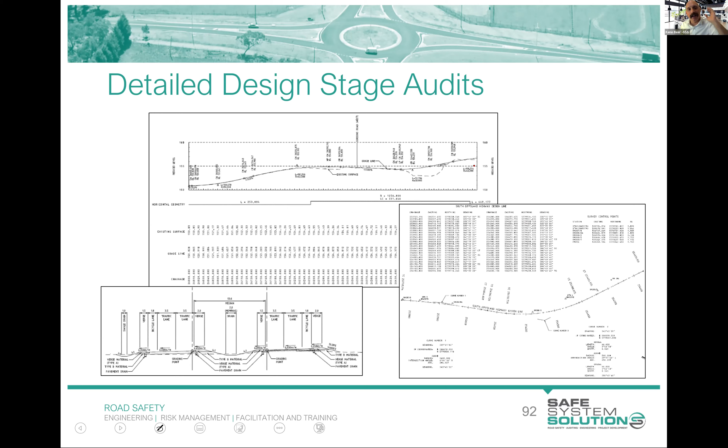The detailed design road safety audit, this is the big one, right? This is where you can get the 500-page design set with the cross sections, the long sections, the lighting design, the pavement design, the signs and line marking design, the drainage, the lot. And you've got to go through every one of those and try to identify are there things in here that are going to cause death or serious injury, or that aren't preventing death or serious injury? You're looking into real minute detail.

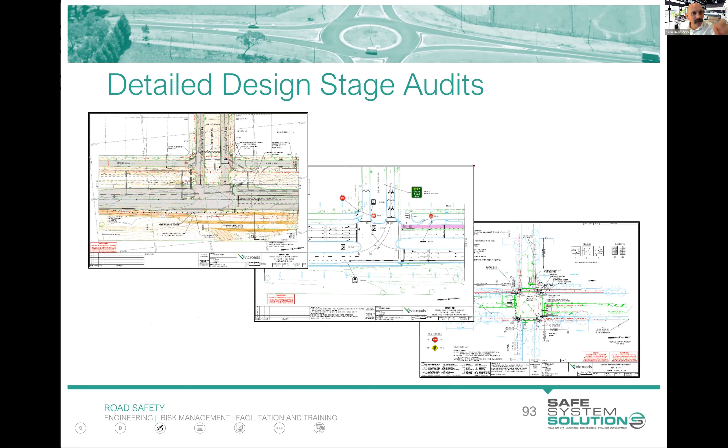They say, well, we're going to have some drivable culvert end walls. You'll be going, what type of drivable culvert end walls? Okay, this one's not drivable at all - that's what an end wall or head wall of a culvert looks like. You run off the road, you hit that, you're in trouble - a car or a motorbike, for that one.

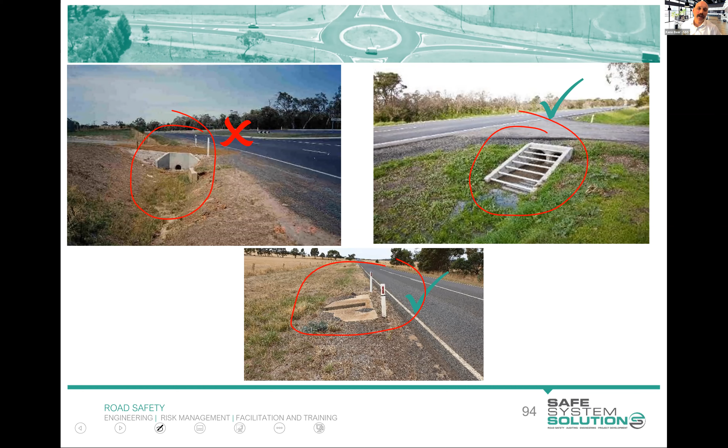This one is a type 1, and this is a type 2. One of them is designed for a culvert that runs perpendicular with the road, and one is designed for a culvert that runs parallel to the road, and they don't work so well if you get the wrong one. There are some standard drawings, but that's the kind of level of detail - drivable culvert end walls, completely random thing I picked, but that's minute detail in a detailed design.

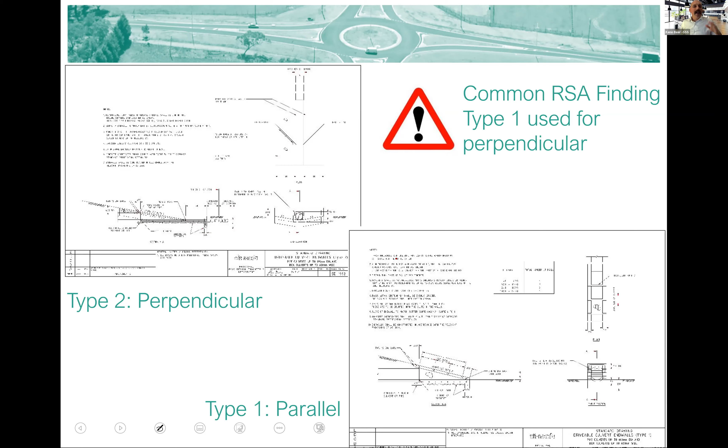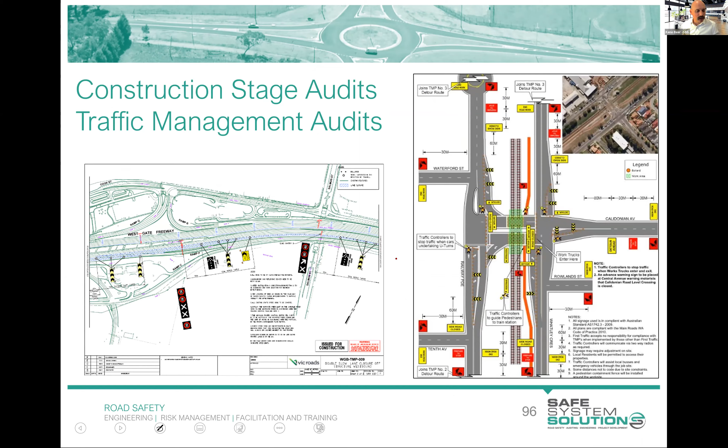Post-opening audit, quick prize for the first person who types in - you've been asked to do the post-opening. They're just about to do the post-opening. It's just opened this road, and can you see any issues? They've just opened the road. You've gone out there two days after it was open, and everybody's happy with it.

Right, yep, Lily was onto it first. Again, it's super high speed internet coming from Lily because a few followed correctly after. So yeah, what do we got here?

Straight and right? Straight and right - well, you're going straight from there, and this one's turning right. We've got forced conflict. When they painted that, they painted it upside down - they got their stencil upside down. That's the kind of thing we're trying to look for. It happens, right? You think, oh my God, that could never happen. Well, the reason you'd hope it would never happen is because there's auditors and there's people checking this.

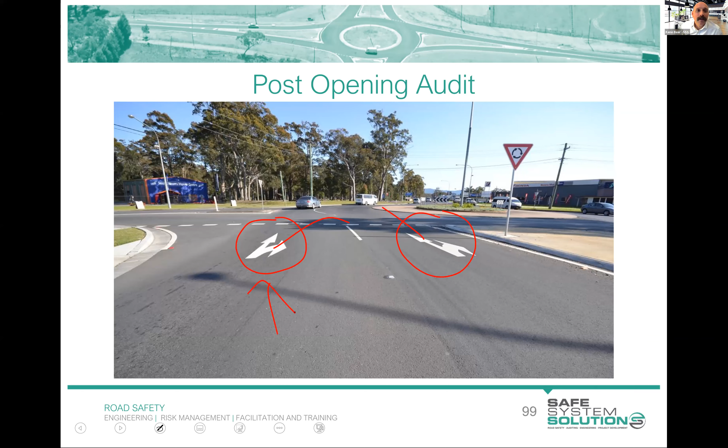Pre-opening audit is just before you cut the ribbon - you're checking the line marking was done right, that sort of thing. The delineators are the right colour, the barriers are set up correctly, and all of this sort of stuff. Sorry, I should say that is one Wally there - there's been a few others. That one I've jumped past a couple of times, so just the one for this little bit.

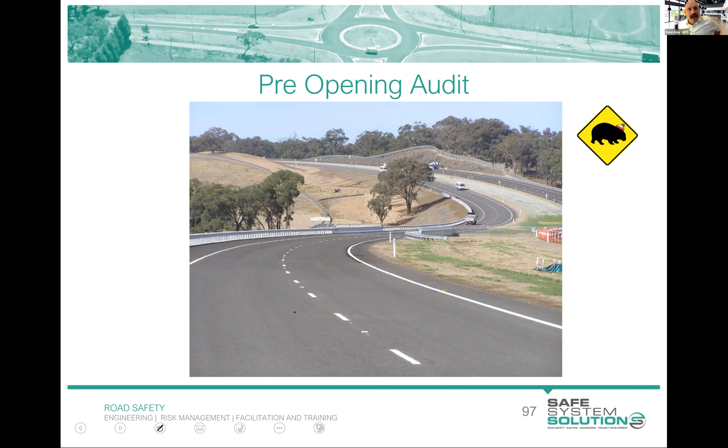Existing conditions road safety audit - I warn you against too many existing conditions road safety audits, because if you're a road authority, you just get a list of tens of thousands of issues. You can just walk out the front of your house or office and audit a kilometre of road, and you'll come up with a heap of issues. It's about having processes and systems to rectify these issues - I'll talk about that a little bit more later.

And thematic road safety audits - so motorcycle, pedestrian, cyclist. Okay, I've got to give you a little assignment to do. Your mission this week, if you choose to accept it - well, you have to accept it because it's your assignment if you want to pass. You are going to be given a random topic, and Kathy's about to generate the random topic.

You'll do a little bit of research on that topic, and create some sort of short video, fact sheet, cartoon, TikTok, whatever you want to do to convey a little bit about that topic to the rest of the group. We want you to relate it back to road safety and road safety auditing, ideally. We are going to give prizes out next week for the most creative way of presenting this information, the most technically sound, and the most engaging.

So over to you, but the topics here, they're all interesting things in road safety. It's just an example of how there's a huge list of stuff an auditor should be aware of. We're just going to pick one of them, but then you'll get info on all the others from the other people.

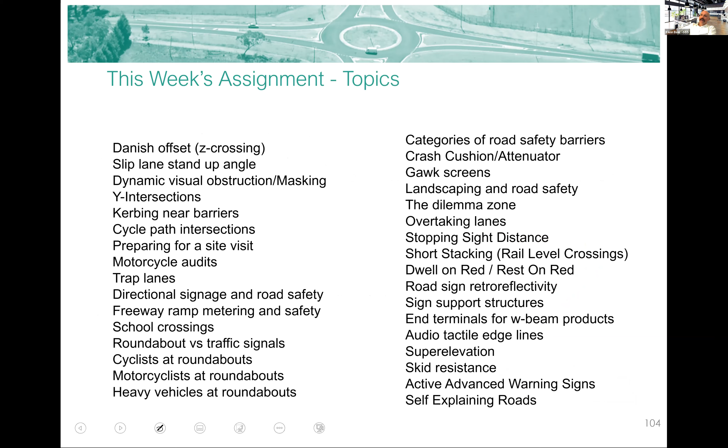And while Kathy gets up the random topic generator for people, I'm just going to have a quick look if there's any questions, if I work out how to do that. All right, random generator. Okay, look, it's moving, I love it. I think you have to say stop, Ken, when you're ready. And stop.

All right, so take a copy of that or a snip of that so we don't lose it, Kathy. Don't try it yet. Sorry, I'm jumping around here. That's okay, I'll tell you what we've got.

Katherine's got active advanced warning signs. Tim's got skid resistance. Sam has directional signage and road safety. Lily, and we've got a couple of Lilies in the group, has got freeway ramp metering and safety. Nick has super elevation. Duncan has categories of road safety barriers. Alisa has motorcycle audits. Zitao has school crossings.

Kent has slip lane and slip lane stand-up angle. John has dynamic visual obstruction. Shannah has trap lanes. Archiemore has dwell on red or rest on red. Christopher has stopping sight distance. Karen has heavy vehicles at roundabouts. James has road sign retroreflectivity. Javier has self-explaining roads. The second Lily has kerbing near barriers, and Wendy has motorcyclists at roundabouts.

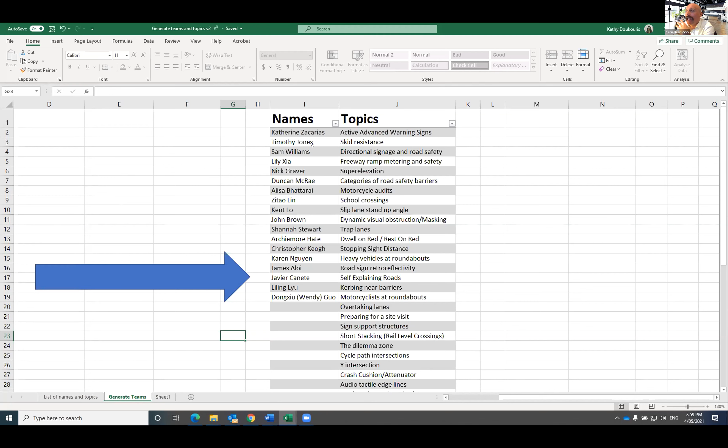Awesome, like every one of these topics I love, and I could talk to you for an hour about that, plus the others. Have a Google of it, find your info. If you're struggling, let me know.

But really, what sort of time would we be expecting people to spend on this, Kathy? Look, we don't want you to spend too long, so we are looking for something fairly short and concise. About an hour. If you get so fascinated about the topic and want to get into it a fair bit, you certainly can, but we're looking at about an hour.

If you get stuck and need some help researching your particular topic, do get in touch with us. I'm just showing you Moodle there, hopefully. So this is where it is, and if you've missed your particular topic, never fear, I'll pop it up here, but it's basically just explaining what you need to do.

We have said it's due by this Friday because you do like a bit of weekend research, topic reading or viewing there, Ken, but look, ideally before next Tuesday's session, so Monday at the absolute latest, and you won't lose points for getting it in too late.

Creative, engaging, technically sound prizes, think of something creative. We've seen cartoons, we've seen podcasts or audio, we've seen videos, just random things. I would love to see somebody do something with interpretive dance. That would be amazing. But just, whatever you think of.